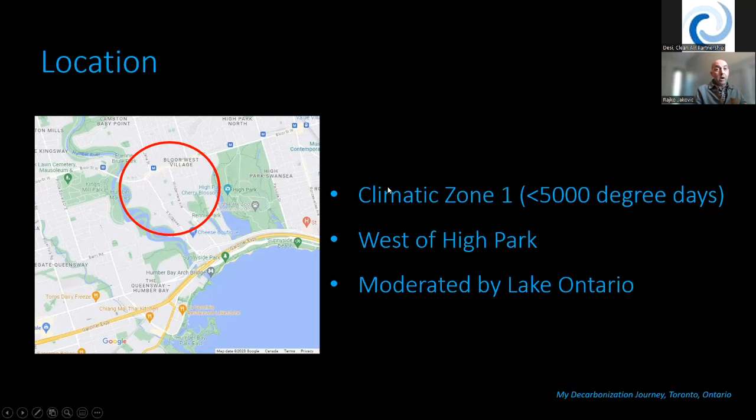We're in what's called climatic zone 1, which again ties you to the building code and what your requirements are to meet it. The existing home looked like this - it no longer does, but this is what it looked like when we started. It was about 1926, the earliest records I could find for the home, and it's 1.5 stories, meaning there was a small room in the attic that didn't even cover the full floor plate - just one room up there. It was about 1,018 square feet, not including the basement. The building envelope was a double brick system that was structural, and uninsulated.

We did make some changes initially when we moved in. Right away, we changed the windows - they were original windows, so we changed them to pretty conventional vinyl windows, double pane, insulated. We immediately renovated the basement and insulated it with about R14. We blew in some attic insulation into the parts of the attic that did not have the room, as I mentioned. It was an oil furnace, so we changed that too.

This was in 2009, 2010 - we changed to a high efficiency gas furnace, and there was already a gas-fired hot water tank, so we just changed the oil furnace to a gas-fired furnace. We also pumped in a cementitious insulator between the strapping of the brick walls - it's a non-expanding cement-based fill. It didn't do much for insulation, but we found it helped quite a bit with draftiness, or air blowing through the house. So the house was reasonably comfortable for a 1926 home with the changes that we made.

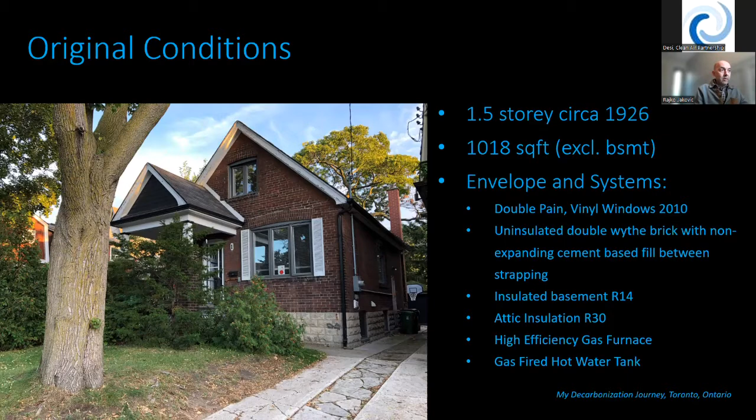However, we had always intended to eventually do some form of renovation, because the layout of the house really didn't suit our family very well. So the plan was to take the roof off and add a full second story.

That would have 3 bedrooms and washrooms on the second floor and a living space on the ground floor. The proposed area was 1,690 square feet, not a lot larger than the existing home. The original brick footprint would remain, with some overhangs at the front and back, which you'll see better in section. The plan was then to significantly improve the insulation in the buildings and the systems.

We changed the windows to double pane, insulated fiberglass windows. The fiberglass windows perform better than the vinyl. They have insulated frames. We have some triple glazed windows in the house, and I'll show you where those are on another slide.

The envelope is now fully insulated. We insulated behind the existing brick, and obviously we insulated the second floor, which would be a code requirement. We changed the gas furnace to an air source heat pump with a backup electric auxiliary heat - I'll talk more about that later. And we got rid of the water tank, installed a gas-fired on-demand water heater.

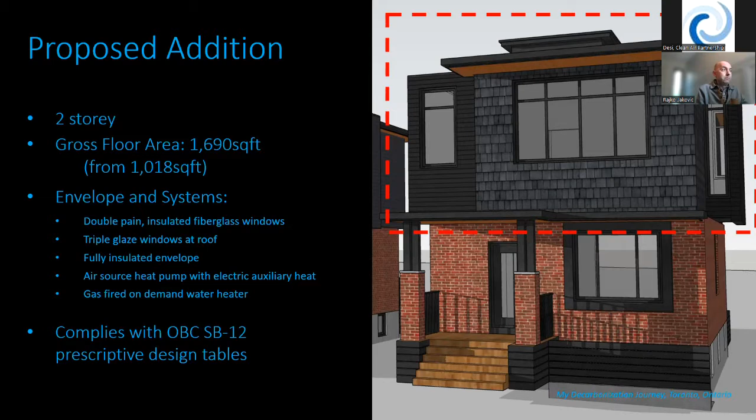So here's a section of the home, and this is important to demonstrate some of the passive strategies that we employed to reduce our reliance on mechanical heating and mechanical cooling. Being in a fairly dense part of the city of Toronto in terms of the size of properties, you don't have a lot of wiggle room, literally, to orientate the home or make certain orientation design decisions that would prove to be more effective.

So we did what we could. You can see we employed overhangs, which in the summer would keep the hot sun out and not shine directly into the home. But in the winter, when the sun is lower, the sun does stream in pretty well. Now, a lot of today's windows come with a coating that reflects that sun back out, so it's not tremendously effective in terms of winter heat gain. But definitely we can feel it - the south part of the home is warmer than the north part when on a sunny day.

So it does work. The other thing that's worked quite well is we have operable windows above our stair at a high level. When we open other windows, we get a breeze through, and we have the hot air vented out of the house. This is also where we've put in triple glazing. We thought we'd have some warm, moist air in this area, and we really wanted to make sure that it didn't condense on the windows. So we put in triple glazed windows up here. This stack effect and exhausting of the warm air works quite well.

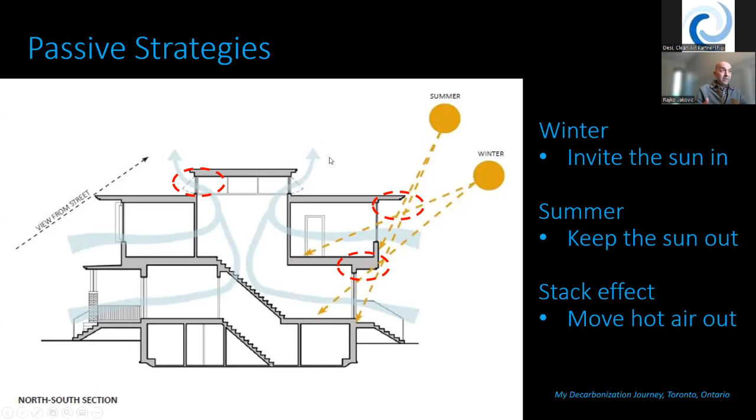Except for very, very hot, humid days - that's when, as you all know, you're stuck. If you want to be comfortable, you almost have to rely on mechanical cooling. Now, having said that, with more insulation, you can do that efficiently. At least we've found that it works quite well. And just anecdotally, we noticed the air conditioning system doesn't turn on as much as in the old home. The house is sealed and well insulated, so it keeps the cool air in.

So what we did for insulation was about R28 in the walls, and the next slide will show you the type of insulation that we used. On the ground floor with the brick walls, on the back of the brick, we had R10, and the reason we did not go higher than that is we did not want to get into a situation where no heat was getting to those walls, because they're designed to be warm so that you don't get a freeze thaw spalling issue on the exterior, and that's pretty important.

R10 was the rule of thumb that we applied to provide the balance between insulating the wall but still making sure that some heat does transfer to the wall to warm it in those days where you get the high swings in temperature, when you get rain in the day when it's not zero and then it freezes overnight. That brick has to have an opportunity to dry.

The header spaces in the basement were about R25. The walls were R13, R14 in the basement, and our overhangs we really insulated very high, so we didn't want to have cold floors here. So we filled those cavities with insulation and insulated on the exterior. And then the roof was about R40.

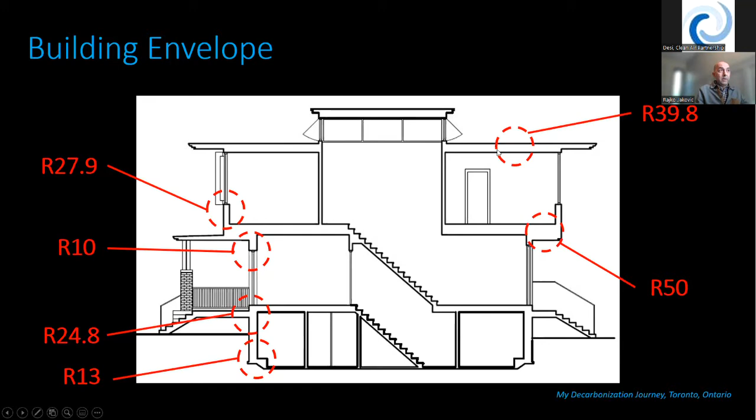The insulation we used in the basement was rock wool, a mineral fiber stone wool insulation. At the roof, on the second floor, we had spray foam, a closed cell medium density polyurethane spray foam. Then on the exterior, which I don't have a photo of, is polyiso, a short form exterior insulation on the surface. The walls on the second floor and ground floor were spray foam as well, the medium density spray foam. On the exterior we had extruded polystyrene, the rigid board insulation on the exterior.

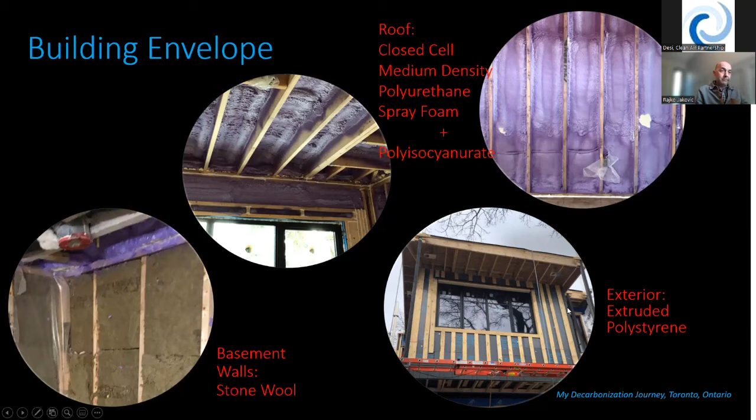That was not my first choice. We did this during the pandemic, and I could not get the kind of stone wool insulation that I wanted. It was a 6 or 7 month wait for it, and we couldn't halt construction and wait for it. So I chose the next best thing for us.

The mechanical systems, I'll sort of point to the photos as I mention them. We have a 2-ton air-sourced heat pump, which the condenser is tucked in at the back here. It's a central heat pump in that it supports a central air system, and there's an air handler inside it. The air handler looks like a conventional furnace, and it blows warm or cool air throughout the house, through ducts in the house, just like a forced air gas furnace would.

This unit has an auxiliary electric backup, so it's essentially an electric furnace. On the cooler days when the heat pump is no longer efficient, when there's not enough heat in the air for the heat pump to draw from and heat your home, it relies on the electric furnace to back it up. I'll talk a little bit about how that system's working and not working for us, and I hope it's user error, but I'll get to that in a moment.

We have a humidifier installed. We have an HRV, or heat recovery ventilator, which is a code requirement. We have heat recovery on the sanitary stack to recover heat from the wastewater, which is also an Ontario building code requirement. And this is our new gas-fired on-demand heater that replaced the hot water tank.

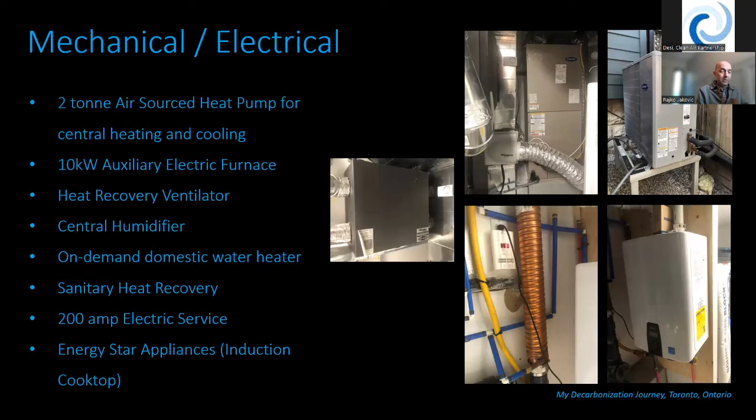The utility bills, which is always a question for everyone, and this is where I'll get to where things are working or not working. The electric bill for the home I showed in the beginning was about $910 over 10 months. The reason I'm using 10 months is I only have 10 months of information for the new home because we've not been in for a full year yet, so I'm trying to compare apples to apples as much as I can. Over 10 months, our electrical bill pre-renovation was $910, and the gas bill was about $1,014. So about $900 and $1,000, roughly $2,000 rounding up.

The electrical bill now is quite a bit higher, $2,400 over 10 months. The gas bill is dramatically lower at $280, so roughly $2,700 total. So you're looking at about an $800 increase.

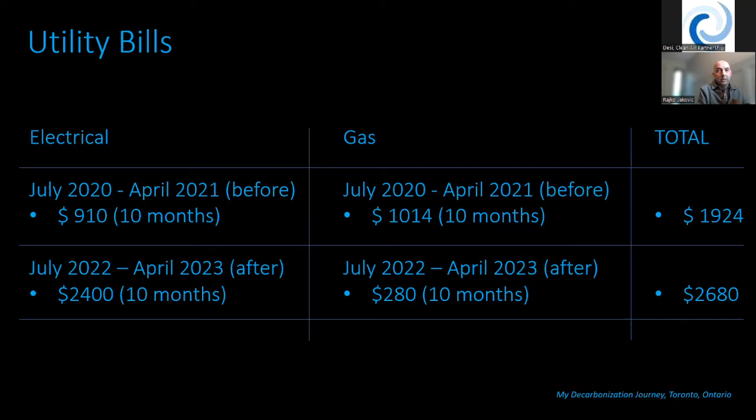So one other thing that we did was we made the house solar ready. We didn't install photovoltaic panels, solar panels, or hot water solar, but what we did do was make sure that the roof structure could accommodate them in the future. I did have a few studies done to see what the house would generate, and it's approximately 5 kilowatts, or almost 6 kilowatts.

The installation is quite simple. My understanding, as it was explained to me, was that they're weighted down essentially with patio stones, and our plan was to do a feed-in tariff program. So it wouldn't involve battery systems in the house, just the feed-in tariff program, which would mean the connections would all be pretty much exterior to the home, so I wouldn't need to route anything through the house.

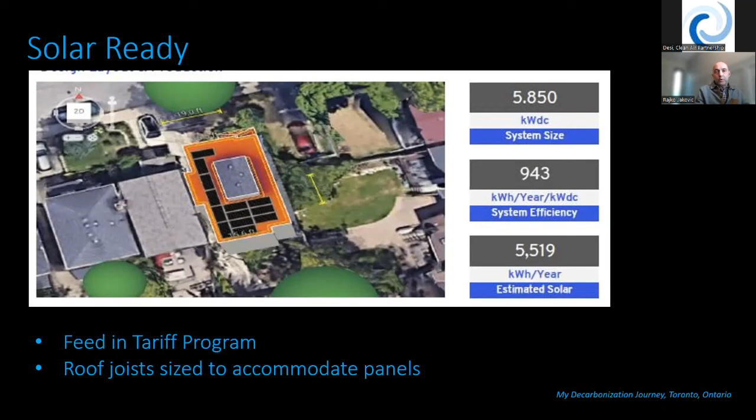One thing that was important in the renovation was building the home's resilience. I know we've all probably experienced a higher frequency of storms, and storms that are stronger and cause more damage. The area in Toronto we live in has quite an old electrical grid, and so we found in some of the storms we experienced that our grid would go down a little easier and would stay off a little longer.

Particularly one, I think around 2012 or 2013, in the winter, the ice storm we had, at least across Toronto and obviously broader than that, but in Toronto was hit quite hard, and we were down for over a week. So that was a real lesson for us that we'd like to build a home that's a little bit more resilient.

So part of that was keeping a gas line for now, and we'd like to install a gas fireplace. How we'd like to use that is when the electrical grid goes down, the gas does not. It's on pressure, so you could run a gas fireplace. So the plan would be in a prolonged outage to use the gas fireplace to heat the home to a reasonably comfortable level, not the same as if everything was running regularly, but just to keep the house from freezing, to keep the pipes from freezing, to keep us able to stay in the home. And the other thing we did was put in a Generlink transfer switch in case of a power outage.

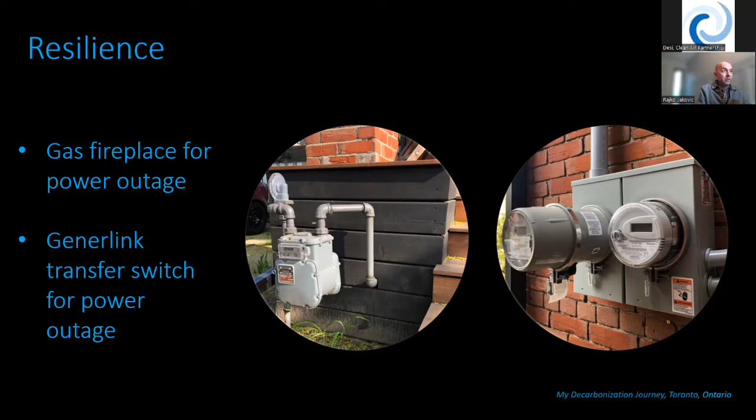Some of the challenges during COVID, supply chain was a big issue, and sometimes you're not sure if it's an issue or not. For example, our mechanical engineer had specified a different heat pump system. The trade said they can't get that, but they can get the Carrier. So we went with the Carrier.

So we had a lot of that, not just with the mechanical systems, but in general it was a challenge, as you've all heard, I'm sure, in the media—getting certain supplies and materials was quite a challenge. We had a challenge with some trades, not all for sure, but some trades were a real challenge. And there's, I found, at least a real knowledge gap in terms of newer systems. There's a real comfort level with the trades to do it the same way they've done the house before, and the house before that, and the house before that. That was a real challenge for us.

And as soon as you asked them to do something differently, the question was, well, why? Why do you want to do that? I had that over and over again on the heat pump. Well, why? Why do you want to do it? Just throw in a gas furnace. So I found a number of them aren't really on board with being innovative, I guess. Certainly not all of them, just some of them, and that was one of our challenges.

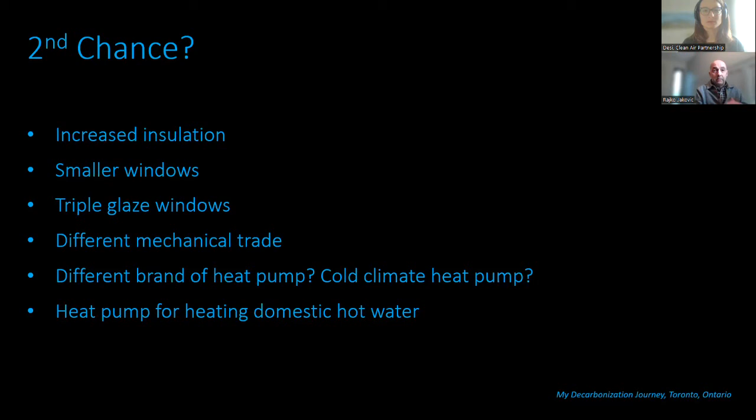That brings me to the end of the presentation, and I'll pass it over to Desi to moderate from here.